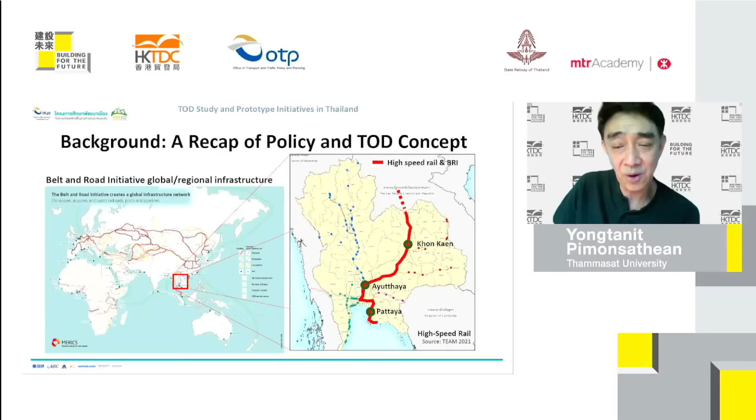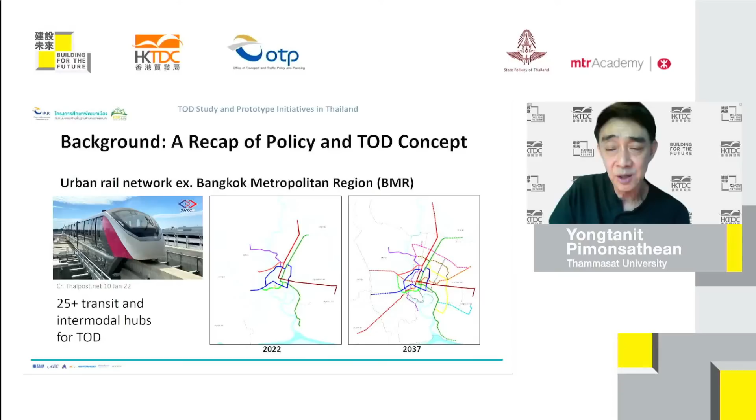When we talk about the expansion of rail and mass transportation in the Bangkok Metropolitan Region, 15 years ahead we're going to have quite a complete network of mass rail transit. From this, we found there is a possibility of developing TOD in the Bangkok Metropolitan Region at about 25 plus TOD stations.

For the national rail network, we are developing a network that increases a lot in terms of coverage area and efficiency, especially with the increase of double track and the introduction of high-speed rail throughout the nation. As a consequence of this national rail network, together with analysis of the logistics master plan for the country, we found there is a possibility that there would be quite a large number of transit hubs with very high potential to develop as TOD.

But on that basis, each TOD site would be different in terms of size, role in the city, and phasing for implementation, because during the 20 or 15 years from now, they are not all going to finish at the same time. So we have the biggest and most powerful TOD site, which we call the regional center.

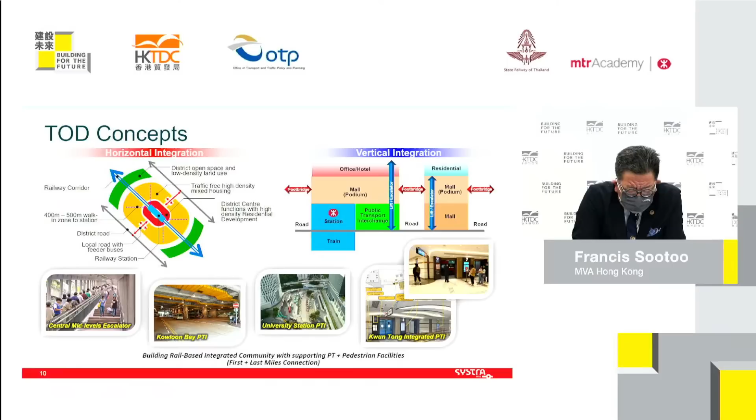For the TOD concept, typically we make use of horizontal or vertical integration within the stations and community facilities. This includes mixed-use commercial function above or adjacent to the station, private and public housing with open space and parks connected seamlessly with pedestrian walkways and corridors, and road-based public transport integrated hubs for feeders, for example first-mile and last-mile connections between 400 to 500 meters.

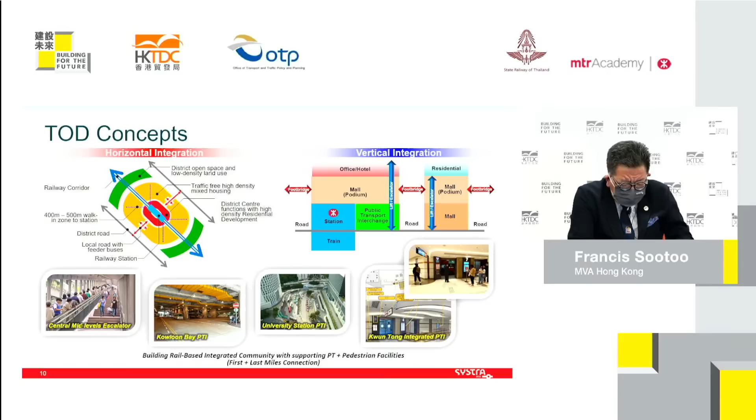Accessibility around the station can be greatly improved for rail plus feeders, as well as enhancing land value and promoting sustainability. So the typical TOD models in Hong Kong are shown here.

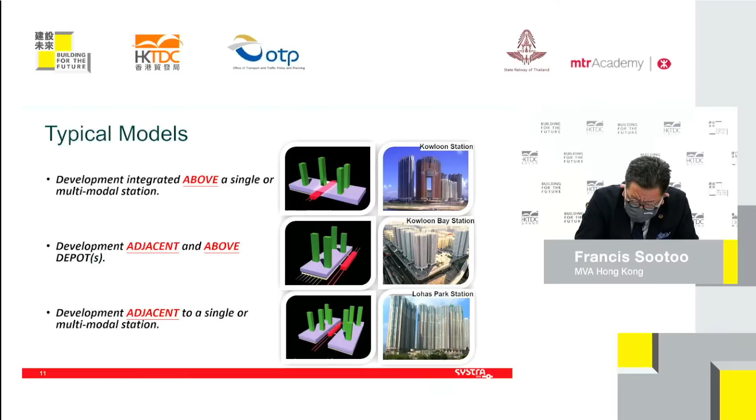TOD RMP projects are not monoliths; they vary from location to location, as the examples here show. We have high-density development integrated above a single or multimodal station, such as Kowloon Station; high-density development adjacent or above a depot, such as Kowloon Bay; and high-density development adjacent to stations, such as Lohas Park, and so on. But the most important factor is the seamless connection to the station and other supporting public transport facilities and catchment, to attract ridership and increase the commercial value of the local neighborhood.

And then there's the Central escalator, which is very famous, and is also one of the projects that was designed by us and our company back in the 80s.

When we talk about TOD models in Hong Kong, the TOD RMP model is quite unique, as the Hong Kong government provides MTR with comprehensive land development rights at stations and depots, in return for the building of the rail system, by means of adopting a bridging-the-funding-gap model. This is also a form of what I call the land value capture model.

The RMP model also enhances the growth of local communities along the railway. To convert these development rights to land, MTR plus the potential developer or joint venture pays a land premium to the government based on the land market value excluding the railway, negotiated before the tender offer to the potential developer. MTR will partner with a potential developer through a competitive tendering process to build the properties above or around the stations or depot, and MTR will receive a share of the profits from the sales of the property.

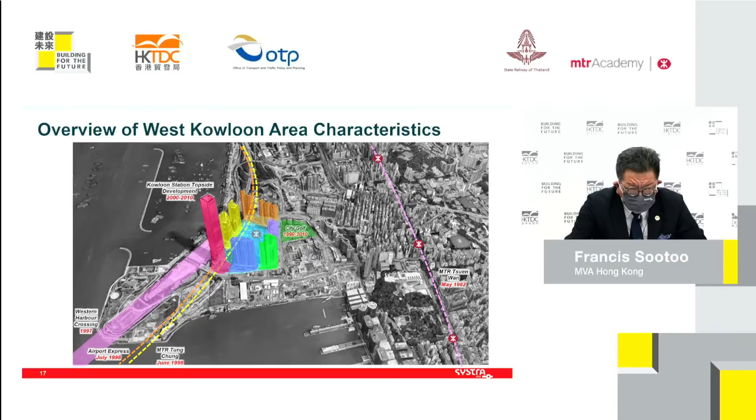The area of West Kowloon, as shown, was transformed after the reclamation with the construction of the MTR Airport Express and Tung Chung Line, running underneath the Kowloon Station in the late 90s, and then the topside development that comes in, which takes over 10 years to build, from around 2000 or slightly before to 2010 plus.

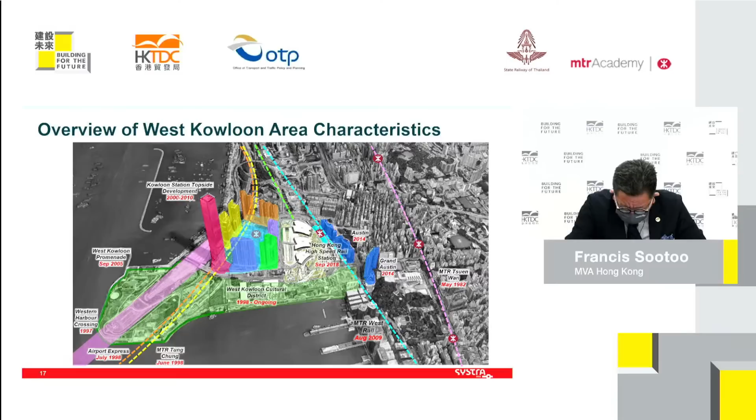Along the west, this was designed and tendered, and one of the developers was awarded for this commercial development above the high-speed rail station.

Along the waterfront, we have the arts and cultural facilities, and all these buildings are gradually being under construction or completed, including the famous Palace Museum, which will open this Saturday, the 2nd of July.

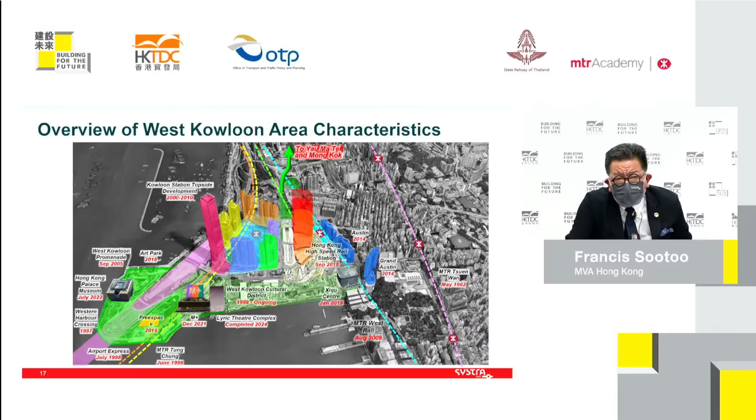Within the area, we have a comprehensive network of pedestrian corridors, either at grade or grade separated. So you can travel north up from West Kowloon to Mong Kok and Yaumatei, while the future Central Kowloon Green Deck and the bus terminal's podium, which is also a park, go all the way down to Tsim Sha Tsui, via Kowloon Park and also the Nathan Road corridor.

Okay, so before I finish my presentation, just a bit of background on MVA.

MVA started in 1968 in the UK. We've been in Hong Kong since the 70s. Ever since we came to Hong Kong, we have been involved in a lot of public transport projects. MVA is also part of the Systra group, which is a French railway company owned by SNCF, RATP, and the French Bank. Systra is a top 10 public transport design specialist in the world, and we are celebrating 65 years this year. Thank you.

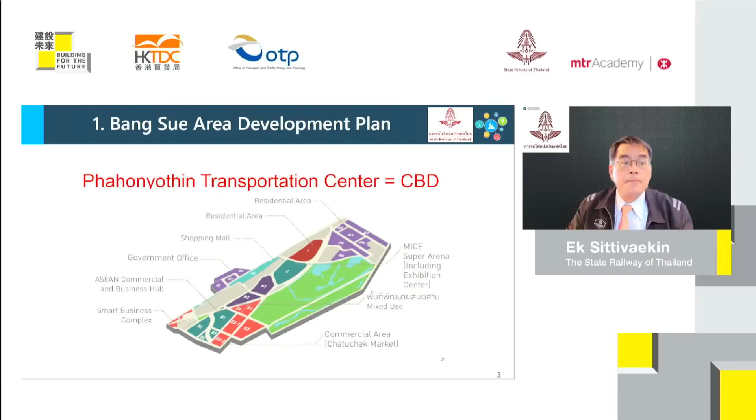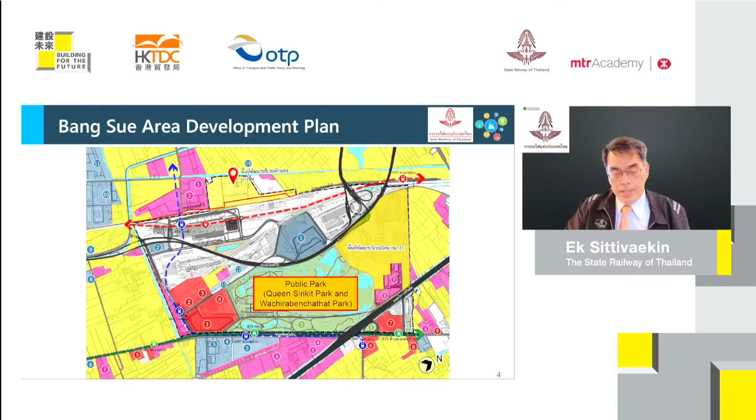As mentioned earlier, Bang Sue Grand Station is located in Bang Sue area. The building has a gross floor area of 500,000 square meters and commercial area of around 45,000 square meters. The station can be regarded as a prime engine unleashing the untapped potential of the property. Concerning land use policy, offices, commercial facilities, and hotels are planned around Bang Sue Grand Station as the land is valuable, while residential areas are planned near the park.

Examples of the zones: Zone C is designed for meetings, incentives, travel, conventions, and exhibitions, or MICE. A Super Arena, including an exhibition center, is planned with the advantage of access from airports and the center of Bangkok. Zone E is for government offices, with skyscrapers planned as a landmark of Bang Sue area. Zone F is planned for a shopping mall, where people can enjoy shopping, an amusement park, restaurants, and more.

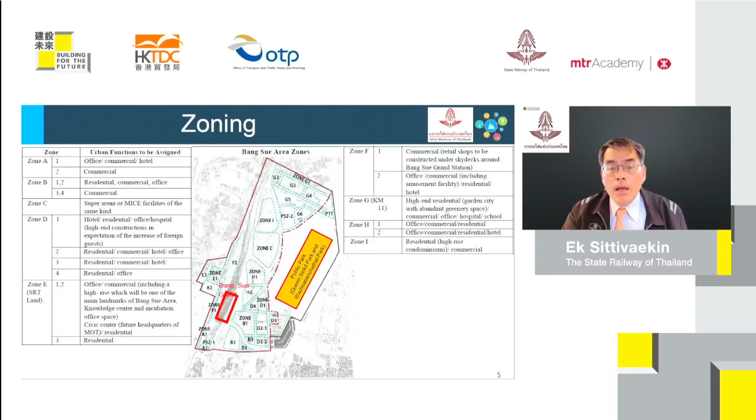Briefly, the Red Line was opened commercially last November. Starting from Bang Sue Station, the service in the north ends at Rangsit Station, a distance of 26 kilometers, while the service on the west terminates at Taling Chan, 14 kilometers away from Bang Sue Grand Station.

Some of you may wonder if any of these zones has been offered to the public. There was a first invitation for open bidding for Zone A, right here, through the PPP process in 2019, three years ago. The second invitation was between 2020 and 2021. In both biddings, no private company came forward to make a proposal.

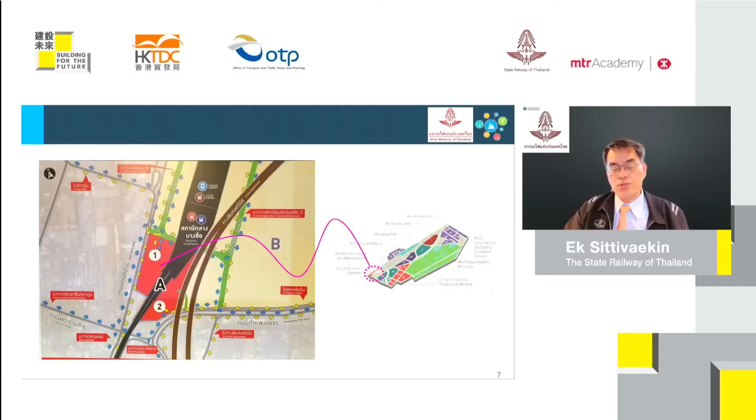Why smart city in Bang Sue area? Bang Sue area, the target area of this study, incorporates 6 intersecting lines, including a high-speed rail and airport rail link, with Bang Sue Grand Station and its adjacent stations serving as a traffic hub in and around Bang Sue Grand Station, while also functioning as a terminal for long and medium distance buses.

Accordingly, the district is envisaged to become Bangkok's new central station and public transport hub, an alternative to Hua Lamphong, or Bangkok railway station.

Moreover, the district is planned to incorporate urban business functions as the new gateway of Bangkok, while embodying the contemporary urban development concept of a smart city. Phahonyothin Transportation Center, Bang Sue area, is part of the inner northern corridor.

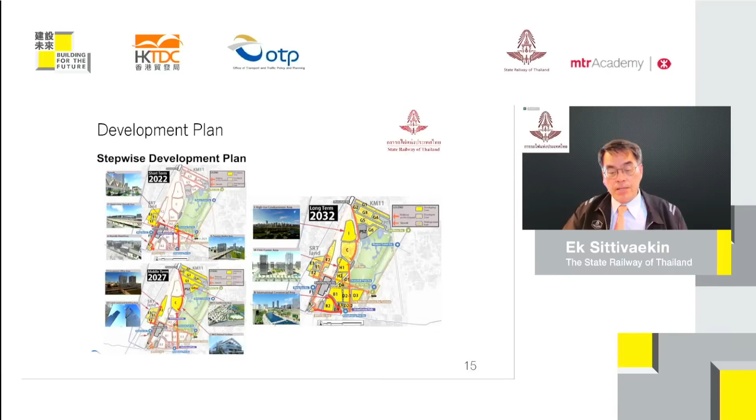Stepwise development to ensure sustainability is shown in 3 phases over the next 10 years.

Let's move on to the last topic, the high-speed airport rail link in the Eastern Seaboard. First of all, what is EEC? EEC stands for Eastern Economic Corridor.

The EEC straddles 3 eastern provinces of Thailand: Chonburi, Rayong, and Chachoengsao. The Thai government hopes to turn these provinces into a hub for technological manufacturing and services with strong connectivity to its

ASEAN neighbors through world-class infrastructure, including road, ports, airport, freight, double-track railway, and high-speed train. SRT is in charge of the double-track railway and high-speed train project. Due to this large-scale project, the implementation outline and phasing schedule are major parts of the master plan.

Scope of the high-speed rail link: it connects 3 main airports, namely Don Mueang, Suvarnabhumi, and U-Tapao. This is the kickoff project of the infrastructure in the EEC project.

The entire route would be approximately 220 kilometers long and reach a maximum speed of 250 kilometers per hour. It would take roughly 45 minutes to travel from Bangkok to U-Tapao.

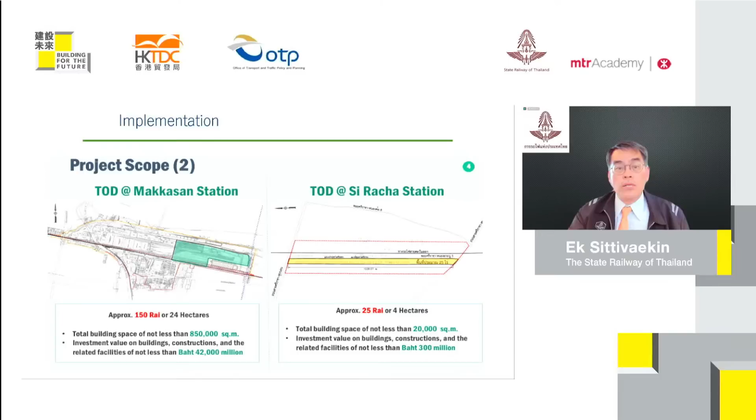Finally, and significantly, the vision for Makkasan and land development enables sustainable, equitable growth throughout the region.

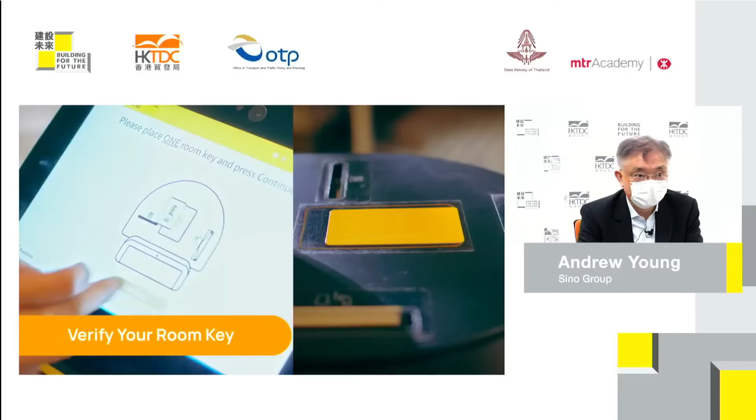This is an example in Hong Kong where it's commonly used: a robot serves guests. Upon arrival at the hotel, you can do pre-arrival registration at home by following a few simple steps. Upon your arrival, our guest services robot will come to meet you at the lobby. Just a few fingertips complete the entire check-in process. If the room is not ready yet, don't worry, take your time to relax first. Once the room is ready, the Smart Hotel system will notify you immediately. When you are going to check out, just come and meet the guest services robot at the lobby. Our guest services robot will lead the way to your amazing journey. Please enjoy your stay and have a great time in Royal Plaza.

Now you can see a robot can replace a lot of human interaction, but the important aspect of this is not just that—it's a new experience for a new breed of travelers who prefer less queue, less interaction with people. We can see technology can enable many tasks that previously had to be handled manually, now totally automatically. Another important aspect of this robot is that if different languages need to be used, the robot can translate or speak in different languages, whether Thai, Japanese, Dutch, or German. Languages can be accommodated much more easily, so technology can really help in this aspect.

Another aspect on top of robots is our mobile phones. Technology is already currently deployed where mobile phones, through NFC, can enable many of these check-in and check-out functions to be used quite effectively.

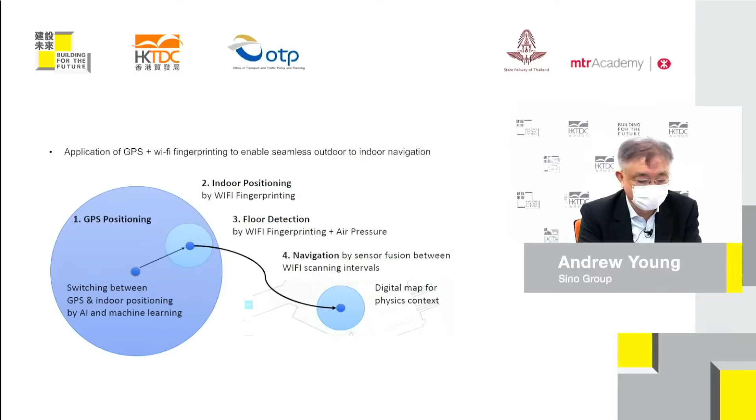We simply use a mobile phone connecting to Wi-Fi; we do not need additional installation of sensors in the asset. We can guide a consumer or tourist within the asset to the places they want to go. You can switch between GPS and the indoor positioning system through AI and machine learning, so for the consumer it's a seamless experience moving from place to place.

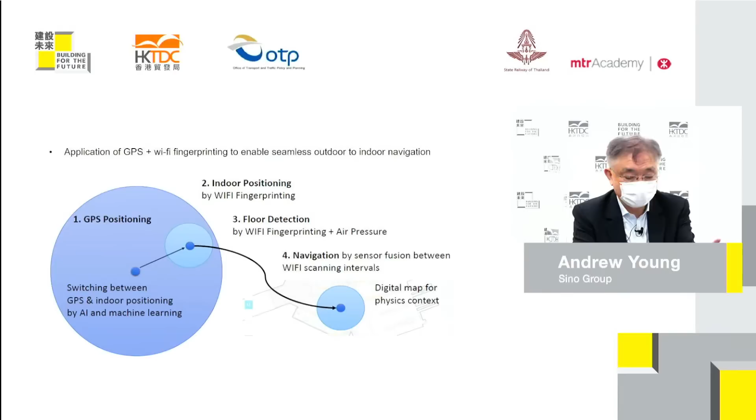One example here in Hong Kong is the YM² Yue Man Square. Those of you who've been to Hong Kong know it's in the Kwun Tong area, and that's one of our latest developments in partnership with the Urban Renewal Authority. It's a big project, and we've built in quite a lot of new technology through the mobile app, so tourists can use the app to effectively find their way around.

Next, when you come to Hong Kong, our latest M+ museum provides a very up-to-date, on-site tourist experience through interactive installations. This new tourism is a classic case of integrating sensors and digital installations that engage visual arts with members of the audience, creating a dialogue between the past and present, and between artifacts and the audience. It creates a brand new experience that users haven't had before when going through a traditional museum.